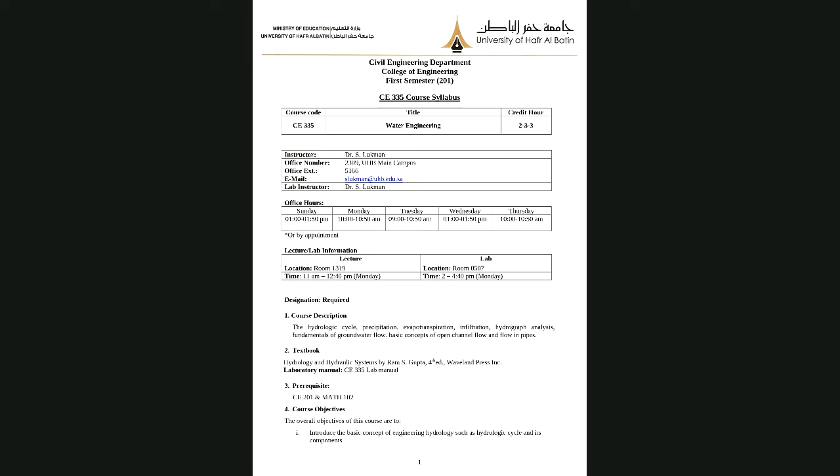These are the course objectives, which you can go through. Let me go to the second page. The course objectives, the course outcomes, the mapping, and then the chapters to be covered. If you look at the course, it's really a very heavy course. It has, I think, 16 or 17 chapters in the book, and we are to go over up to 15 or so.

So basically, it comprises hydrology and hydraulics. So it is a very heavy course which will introduce you to hydrology and hydraulics, or in general the water engineering aspect. But we will be introducing you to the basic concepts under each chapter. We will not go so deep. We'll introduce you to the basic concepts under each chapter, and then leave the rest for anyone that may be interested in taking option electives at the senior level in water engineering.

For instance, the same course is broken into about 3 or 4, about 4 courses at the senior level. So you have many courses that you can go and take, where you will be introduced to the deeper treatment of topics under the course. You can see here. So this is it. Let me go to the next page.

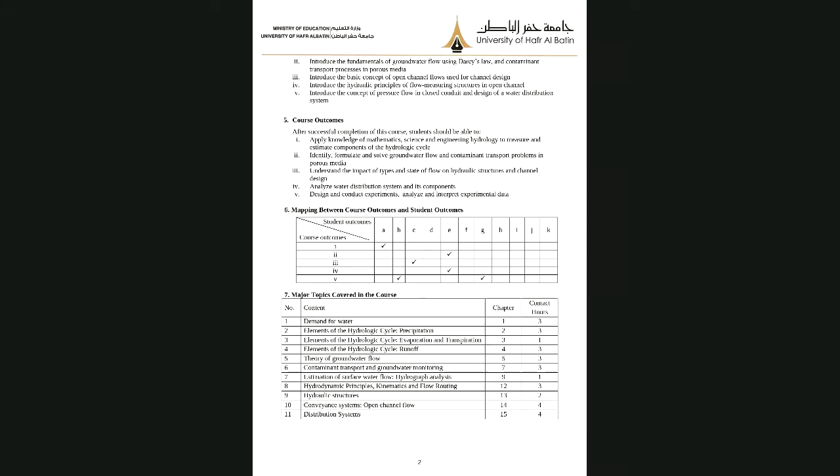So attendance in class, I think most of you took fluid mechanics with me, you know the rules for attendance. Although the lecture is going to be online while the lab is going to be on site, for the online as well you need to be available before the start of the class, which is on Monday at 11. You should be there. If you are late by more than 5 minutes, you will be marked as absent, okay?

And for the lab, you should be available at 2 exactly, because we are going to start at 2 exactly. And then, of course, the DN policy: 3 absences, warning 1. 5 absences, warning 2. 7 absences without excuse, DN. With excuse, DN is 10. And for the lab, missing 1 lab is warning 1, 2 labs warning 2, 3 labs is DN. With excuse, you have up to 4 labs. So you are all matured enough now not to just be absent like that. So I hope nobody will have DN in the course.

And when assignment is given, okay, if you have any excuse for not attending a class, you should get authorization from the college excuse committee. There is an excuse committee chaired by Dr. Slayer, although he is not here, but I think Shiraz is part of the committee where you can present your medical excuse or whatever it is for them to issue an official excuse that you are to present to your instructor.

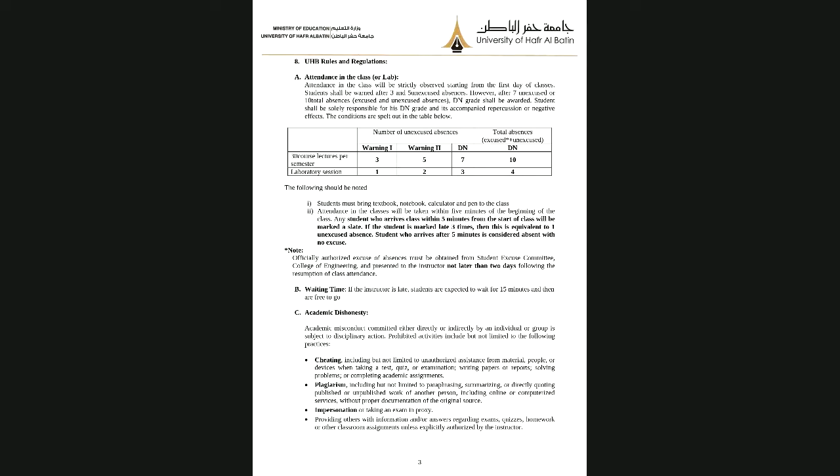Now, penalties for violation of academic integrity: of course, you can get 0, you can get F, okay? If you are found wanting, you can get F. I mean, the grade on the assessment can be reduced if it is established that you have really cheated. All this can happen. And then lab rules, we all know the lab rules, okay?

Now you will come in with your face masks, and we'll provide hand sanitizers in the lab, and we'll provide hand gloves, okay? And social distancing will also be established. Assignments and quizzes: as usual, every 2 weeks we will have a quiz, and every 2 weeks we will have an assignment, okay? And this is also in the weekly schedule, as we are going to see.

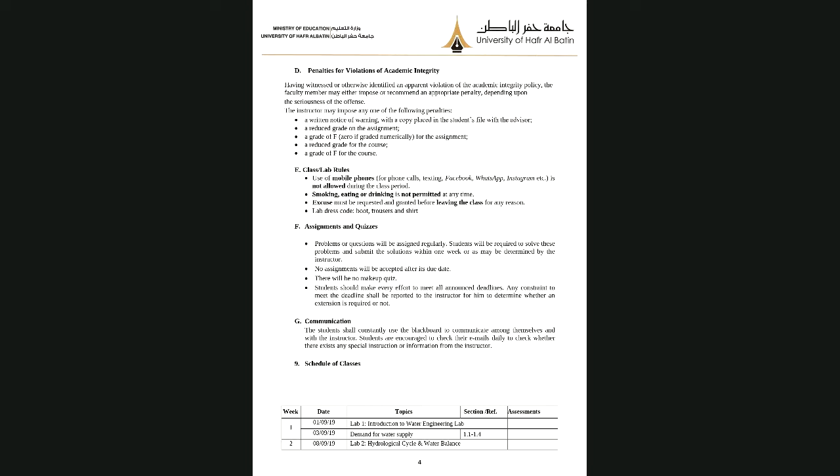Okay, so this is the schedule of classes for week 1, what we're supposed to do. Let me move to the next page.

I hope you can hear me clearly. Okay, good. All right.

So this is the weekly schedule, note the dates for the major exams. Major 1 is going to be held week 6. So start preparing now. And you have to ensure that you don't have any conflict with other courses, which we tried as much as possible to avoid, okay? So check your other schedules and ensure that you have no conflict. Don't come during week 5 or week 6 to say, no, I have a conflict with so-and-so course. Check all the syllabi, check the major exam dates now.

And ensure you have no conflict. Of course, when forming this schedule, we ensured that there is no conflict with general courses and what have you. So check to ensure that you have no conflict. It is your responsibility, not ours. And don't come week 4 or 5 to say I have a conflict, because then it may be too late. And like I always say, start reading from now. You don't wait until week 5 or 6 when the major is around the corner before you start reading.

Our major 1 is going to be week 6 on Sunday at 6 to 8, okay? And it's going to cover the first 4 chapters. And the midterm lab major is week 9, during the lab hours, and major 2 is going to be week 11, okay?

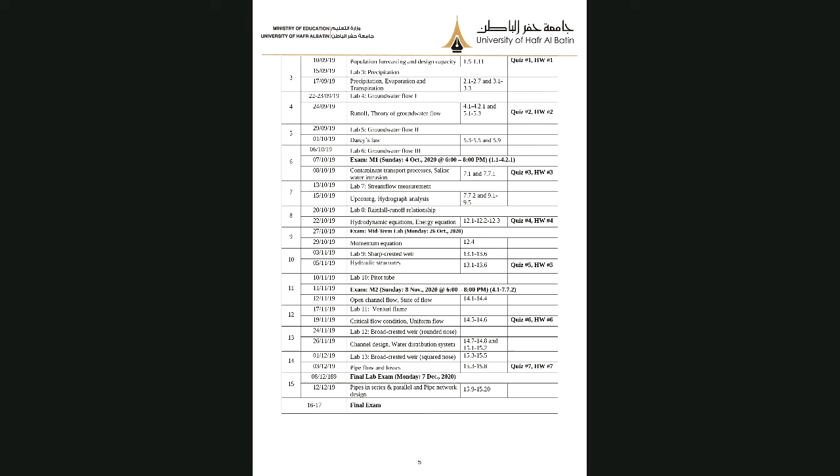Okay, so then the final lab is going to be on 15 during the lab hour. Now the next. Okay, this is the major exam schedules. So, like I always say, please check your other courses and ensure that you have no conflict. If you have any conflict, report to the instructor ahead of time. Report now. Don't wait until it is week 4, 5, or 6 that you will realize that you have any conflict, and then you will begin to run helter-skelter here and there.

Okay, check all the syllabi and ensure that you have no conflict. Make a calendar for all your major exams. And I think I will also create a WhatsApp group for the class, so that it may enhance our communication. Although nowadays I normally keep my phone in the office, so it's active during the working hours. When I go home, it may not be there, but the WhatsApp group may be a very good way to communicate.

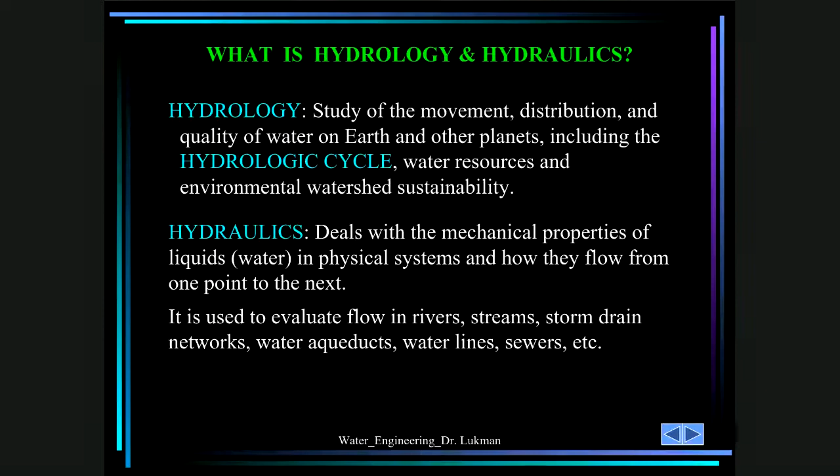Okay. Like water engineering. What do you want to say, Hamdan? You said D, is it D? Are you referring to the previous? Oh, like water engineering. Okay, clear. All right. Oh, you are referring to the reading quiz. Okay. Now the next slide. Feel free to ask any question, please. If there is anything not clear, feel free to ask. Okay.

Yeah, you can see this. Reducing its size because you can see that it has overshoots.

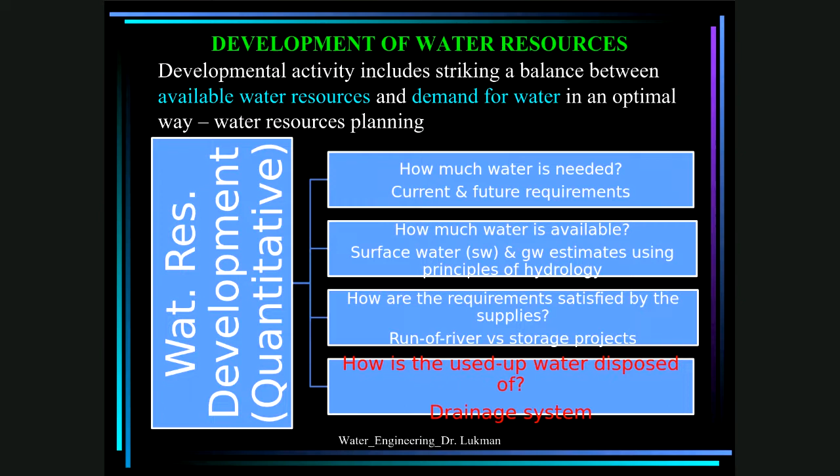Now we will move to the other part, which is the qualitative part. Any question before we move on? Here I saw Muhammad Bashar saying groundwater, surface water. So what do you want to say? If you want to talk, you can talk, okay? Your audio is enabled. So if you have any question, you can always talk, okay?

So now, still on water resources development, is water like environmental engineering? What do you mean by is water like environmental engineering? Water and environmental engineering go hand in hand, as we are going to see here. The qualitative part has to do with environmental engineering. Let me present this slide and then I will come back to your question.

Okay, so for water resources development, I explained the quantitative part having to do with the quantity, the source of water, and then how we dispose of the used up water. Now the qualitative part deals with the quality of water. What type of water is needed? What is the quality? Do we just go to the ocean, get the water and pump it to the household? No, the quality is very bad because the ocean water is salty. It needs to be treated.

And that tells us what kind of water as well. Is it water from the ocean, from rivers, from lakes? What treatment is required? Because once we ascertain the quality of the water, that will tell us whether we need to treat it before distributing.

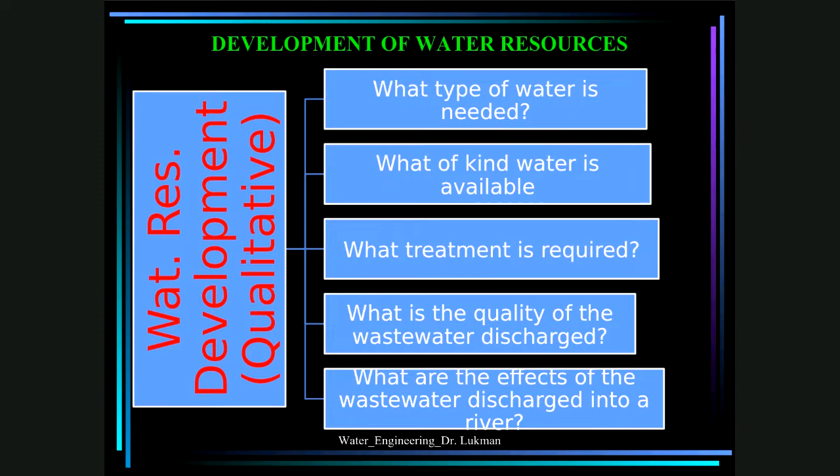Now, demand for water supply. Okay, I already started explaining the demand for water supply. Here I will explain some specific things. Withdrawal uses. Okay, we use water. This involves diversion of surface water or groundwater for irrigation or water supply. Okay, when you take out water from any source, either surface or groundwater, for irrigation or water supply, this is withdrawal uses, and we have non-withdrawal uses.

Non-withdrawal uses means we use the water in place, in situ. Okay, we use it in situ, that's in place. Involve on-site uses such as navigation. Navigation here is just providing pathway for boats, for ships to navigate, to move around, okay, on the water.

And for recreation, you have the Corniche, okay, where you just go and relax and look at large bodies of water, and then just take some refreshment and enjoy the scenery. So these are non-withdrawal uses because you just go by the side of the ocean and just watch, okay, and that's it. And then you have the consumptive uses.

The consumptive uses here refers to withdrawn quantity that is no longer available for further use. That is, it is water you withdraw, similar to one. But then, like in irrigation, when you just pour water on the crops, some will sink to form the groundwater flow, and some will run down the channels. Okay, but then some of the water will be used up by the crops.

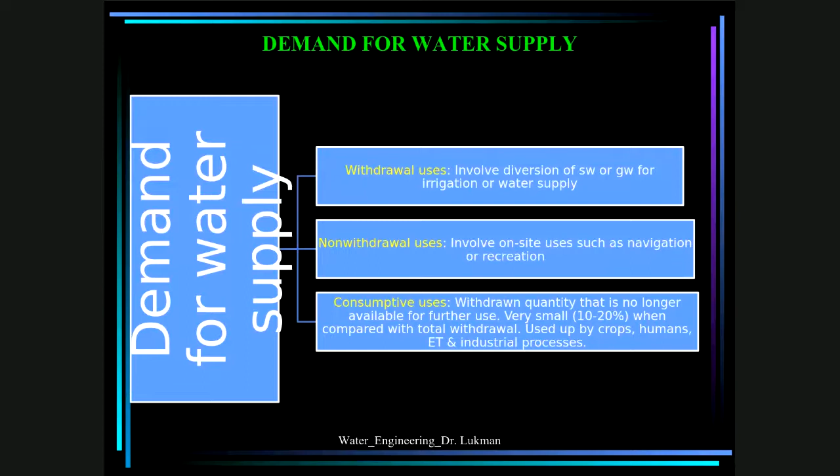Now, this is figure 1.1, which is about water requirements of a city of 150,000 population. Hafrul, I don't know how much is the population of Hafrul, but probably maybe 300,000. I don't know. Okay, let's say around 300,000.

So here in this figure, you have well... 1 million. Woo! So Hafrul is a big city. Okay, yes, Doctor, 1 million. So it is really a big city. But I tell you, 6 years back, it wasn't 1 million, maybe 600,000 or thereabout. It is growing by the day. Every now and then, it is expanding, and a lot of development, I tell you.

So here you have a well field, and you have a river flowing. So part of the water from the well and part from the river are supplying this city at which rate? 35 CFS. CFS is cubic feet per second. So out of this 35, household use is 40%, commercial 13%, small industries 30%, and public and losses 17%. You always have losses in the system, like pipe leakages and what have you, okay?

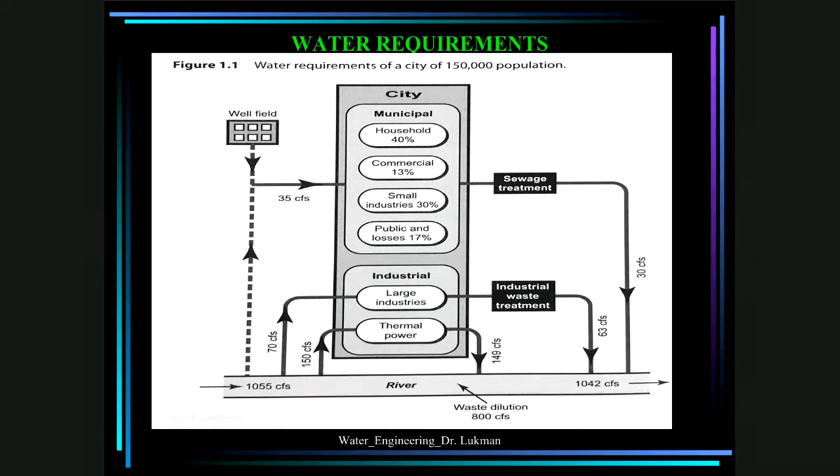So now, get your pen and paper. I will ask you a question now. Concept quiz, very simple question. From figure 1.1, the municipal consumptive use is A, B, C, or D. So now tell me, what is the municipal consumptive use? Type your answer.

Municipal consumptive use. Can you hear me? Yes, Doctor, yes. So what is the answer? Type your answers, all of you. I want to see answers from all of you. Ahmed, Abud. What about the remaining guys?

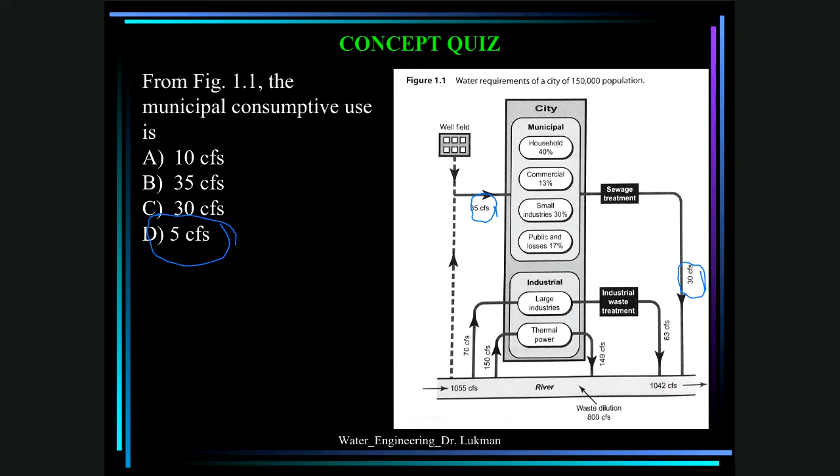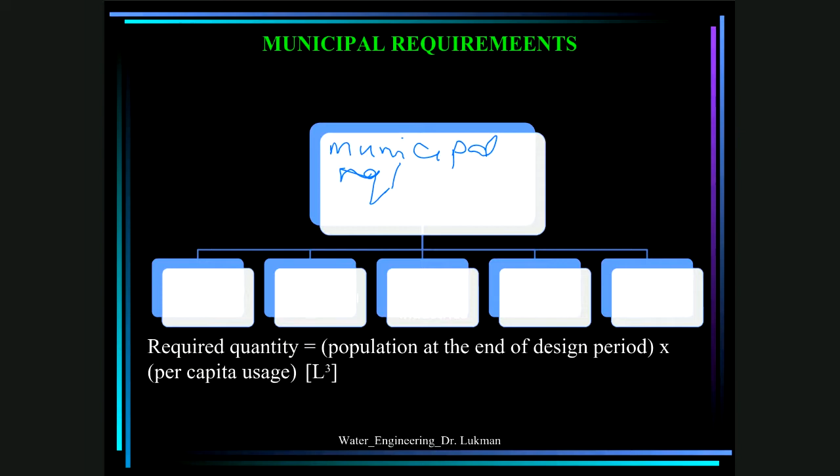I can just write it. Municipal requirements depend on. Okay, so the first here is population, and then population characteristics,

and then nature and size of industries, and then climatic conditions. It will be clear on the slides when I upload it on Blackboard. Okay, and then cost of supply.

So municipal requirements for supply of water depend on the population. Of course, population is one of the most important factors here. You need to know the population size that you want to supply water to, and then the population characteristics. The population characteristics here may refer to how are they increasing? Is the population the same or are they reducing? You may have some towns whose population is reducing.

Okay, and then nature and size of industry. Do you have huge industries, large industries that demand a lot of water, or is it that you don't have any industry? And climatic conditions here, the weather: is it a country in which it is very hot? In hot weather definitely you need more water than in cold weather.

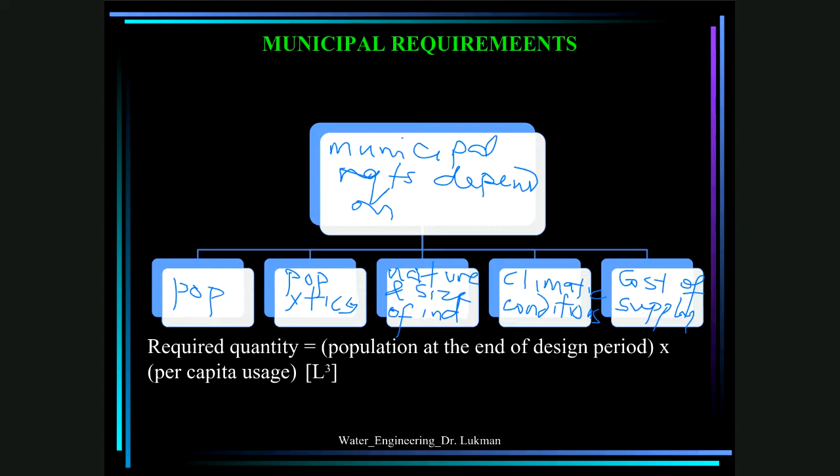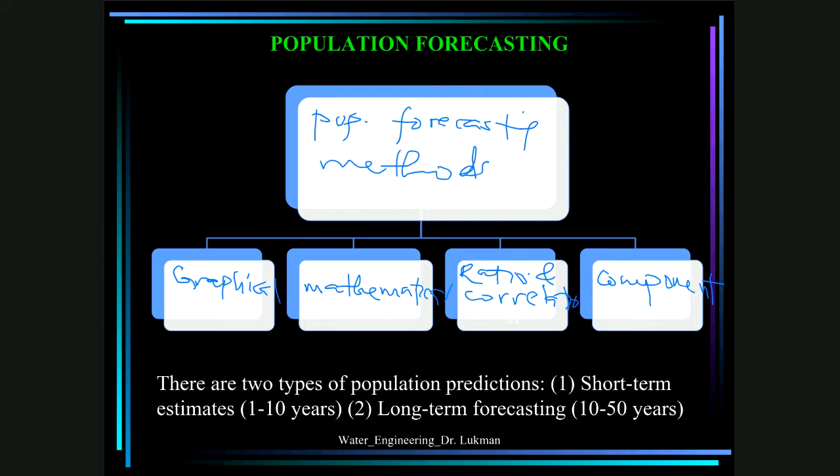Now, short-term estimates, 1 to 10 years, have many methods under them. This is the population curve, population versus time in years. From A to B, you have the geometric growth, in which the rate of population increase is directly proportional to the population that is currently obtainable. So dP/dt is proportional to P.

Then you have B to C, what is called the arithmetic growth, or constant growth: the rate of population increase is constant, so it's proportional to 1. The population is increasing at a constant rate, and that is why it is proportional to 1. It can just be proportional to k, where k is a constant. And then you have C to D, which is the declining rate of growth.

In this case, the rate of population growth is proportional to the difference between a saturation population and the population, which is P sat minus P. For our discussion here, we will take examples of the geometric growth and the arithmetic growth, as well as the graphical methods. So, next.

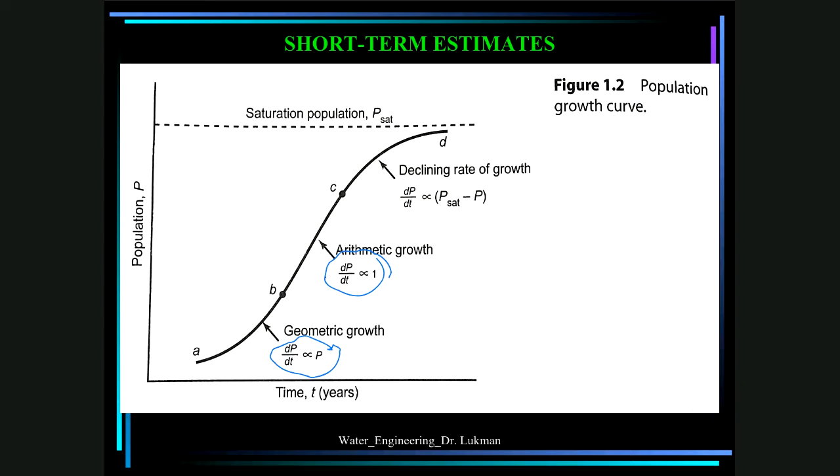Now, for the arithmetic method, like I said, the rate of growth is a constant. The rate of growth of the population is proportional to 1. So when you remove the proportionality sign, you introduce a constant. So this constant Ka, the A is indicating the arithmetic growth, where P is the population, T time in years, and Ka is the uniform growth rate constant. That is the rate at which the population is increasing.

And when you integrate this, of course, when you have dP equal Ka dt. From your math 102, you integrate, isn't it? When you integrate here, this becomes P from P1 to P2, and then this constant Ka, and then T from 0 to delta T.

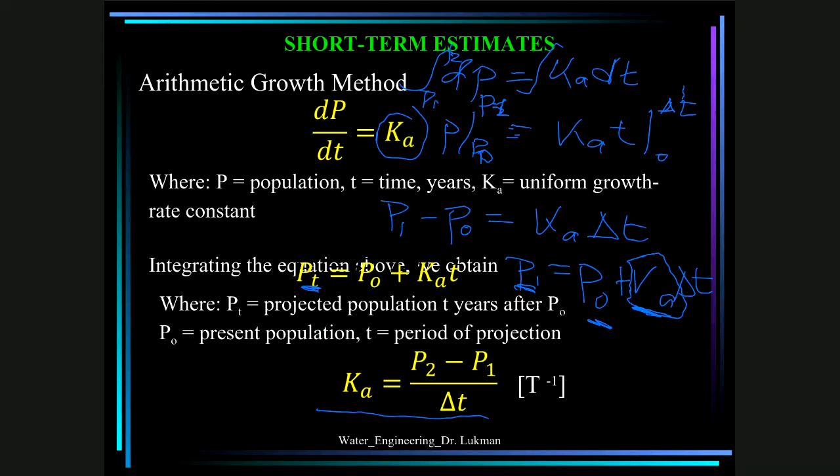Here, if you make Ka the subject of the formula, you will arrive at this formula. So Ka is equal to P2 minus P1 over delta T, because that is the first thing you need to do. You need to determine the uniform growth rate constant. It is when you determine the uniform growth rate constant that you can find the projected population. We are going to solve some examples. Now, this is for the arithmetic method.

For the geometric growth method, we have shown from the graph that the rate of change of the population is directly proportional to the current population. So when you remove the proportionality sign, you introduce a constant Kp, which is the population growth constant for the geometric method. And when you integrate, similar to what we did before, you will arrive at this, and when you make Kp the subject of the formula, you will get this formula. So Kp here is the geometric growth rate constant, and the unit is per year, time here normally in years. We are going to solve examples where we will apply these equations.

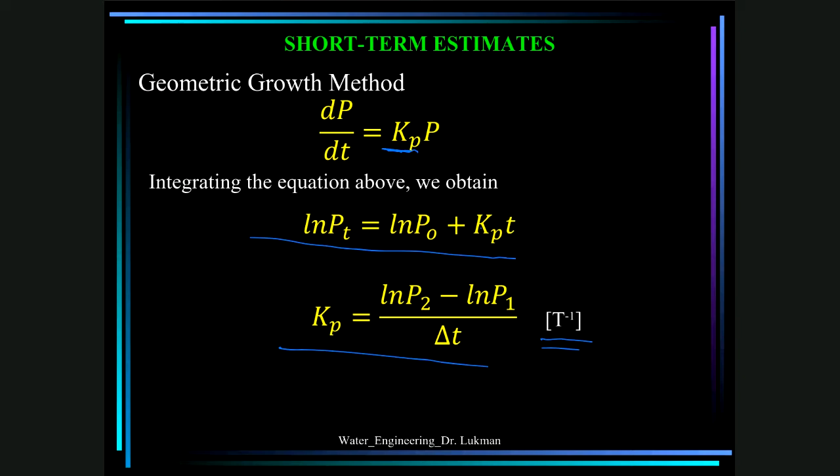So let me move on. In the example here, get your pen and paper, please. From the following census data, estimate the 1995 and 2010 population by A, the graphical method, and B, the most appropriate mathematical method. Here you have the years 1970, 80, 90, and 2000, population in thousands. So 25 here is 25,000, 30.5, 37.25, 45.5. This is the census. Census is counting population.

So we have to estimate the population for 1995. 1995 lies between 1990 and 2000, isn't it? So this is where 1995 will be, correct? And then 2010, after 2000, is going to be here. So let's see how we do that. First, using the graphical method, and two, using the most appropriate mathematical method. The arithmetic method, the geometric method, they are all mathematical methods.

Now, simply plotting this in Excel, you are all conversant with computers. You might have learned Excel, but if you haven't, don't worry. For numerical methods, CE 301, you will learn Excel, and there you will learn how to plot and how to find the line of best fit.

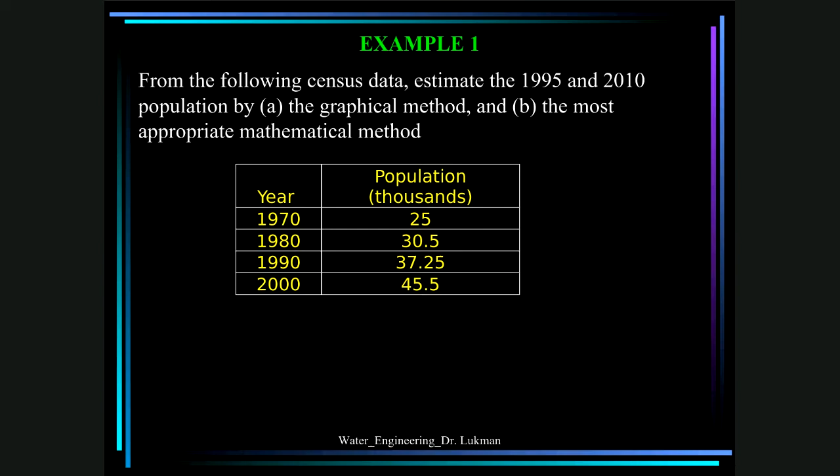Now the other method, because it says the most appropriate mathematical method. So here you may choose to use either the arithmetic method or the geometric method. Usually you will realize for a given problem they may not differ so much, but for demonstration, let me use the arithmetic method here.

For the arithmetic method, we mentioned that we first have to determine the constant rate of the population growth, the growth rate constant, Ka, which is given by P2 minus P1 over delta T, correct? And if we plug in the values, P2 here, it will be for 1995. So we will take the values of population from 1990 to the year 2000. And what is the population? What are the values?

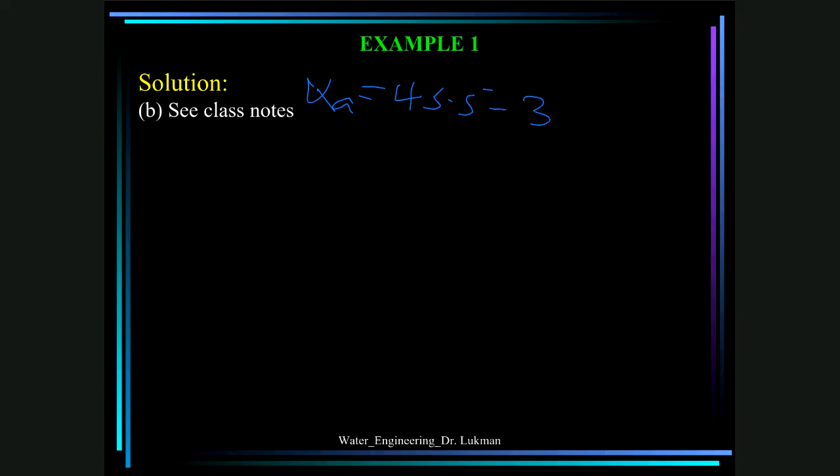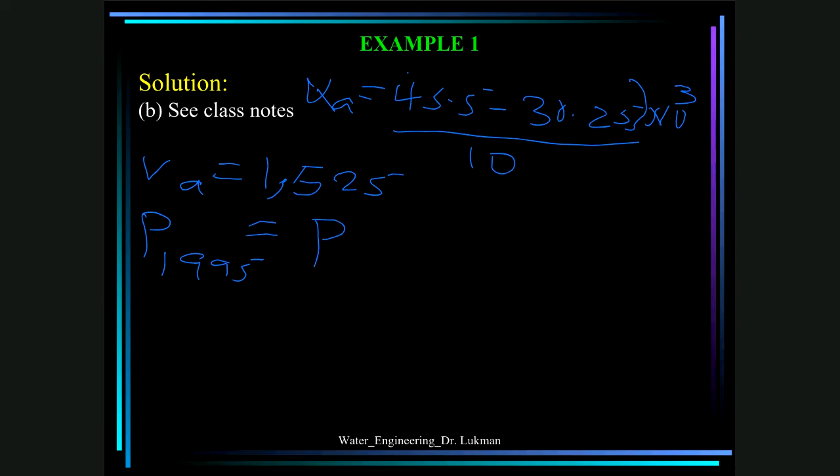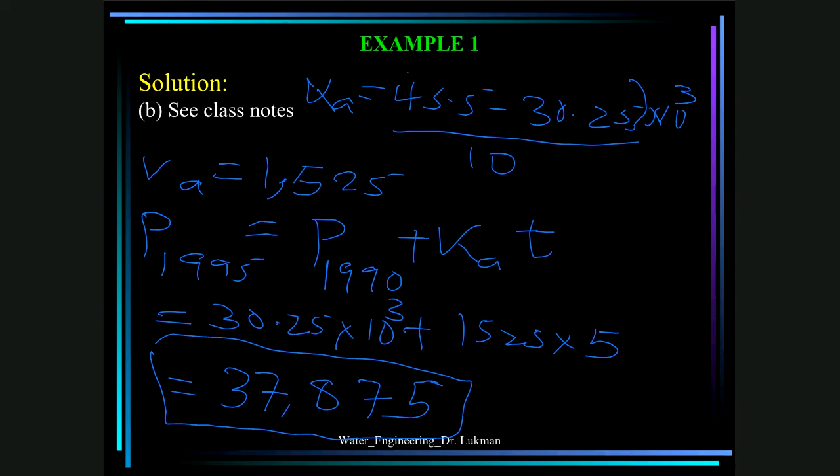So this gives me 37,875. Yes. So this is the population for 1995. And if you like, you can use the geometric method as well to check. The value may differ slightly. Why 5? Because from 1990 to 95, that is 1995 minus 1990, which is 5. It is the time. All right.

Now, attention quiz. You have to solve this and let me know your answers. From the census data provided in example 1, this table, estimate the 1985 population, not 1990, by arithmetic growth method. Here I'm specific. Hint: find the population growth constant Ka using 1980 and 1990 populations. You have 2 minutes. Just post your answer A, B, C, or D.

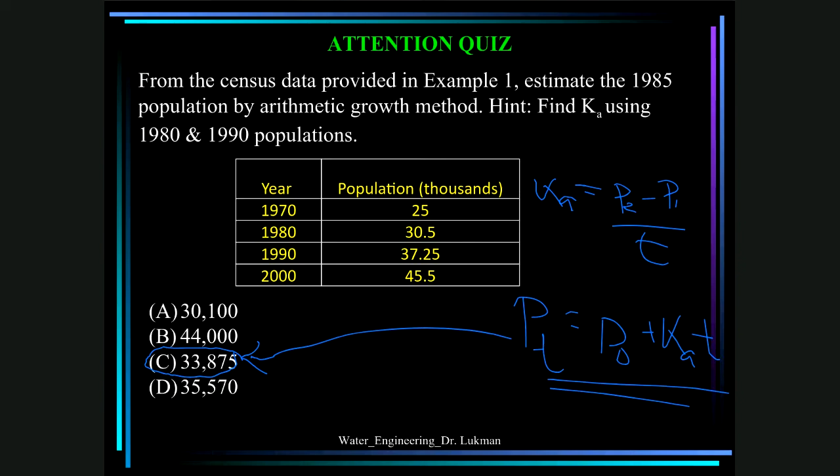Now this says a city has a present population of 200,000, which is estimated to increase geometrically to 220,000 in the next 15 years. The existing treatment plant is 51 million gallons per day. MGD is million gallons per day. So the capacity of the treatment plant is this, the current capacity. The rate of input to the treatment plant is 165 gallons per person per day. For how many years from now will the treatment plant be adequate?

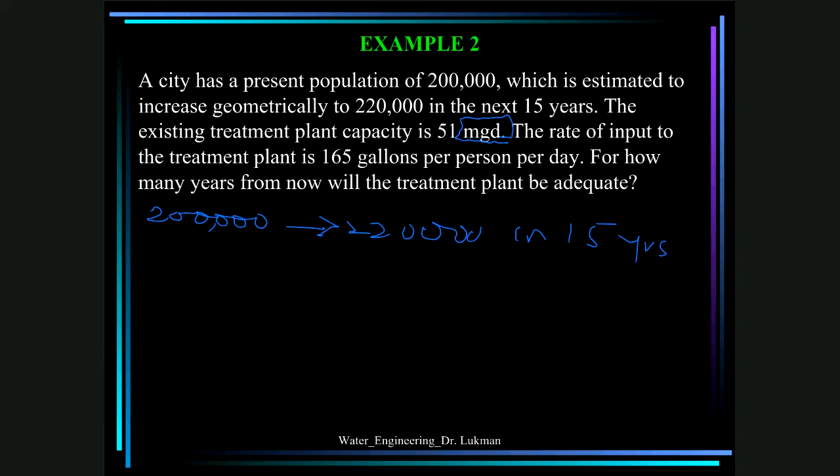Let me break down the question so that we understand. We have a population now of 200,000, which will increase to 220,000 geometrically in 15 years. The current capacity of the plant is 51 million gallons per day. And the rate of input to the treatment plant is 165 gallons per person per day, or you can say per capita per day. Capita is person, that is per head. So the current input is 165 gallons per capita per day.

So now, the first thing that we need to do is to find the population that can be served by the plant based on these two numbers. This is the plant capacity, and this is the input per capita per day. And how do we do that? By just dividing. This is in million gallons per day, and this is 165 gallons per head. Per head meaning that is the population.

Gallons per capita per day. So now gallons cancel, day cancels, so capita will now give us the population. So in total we will get about 309,000 persons. So the plant capacity will be able to serve this number. Remember, the current population is 200,000, and it will increase to 220,000 geometrically in 15 years. The question is, how many years from now will the treatment plant be adequate? The plant can serve up to 309,000 persons, but it is currently serving just 200,000.

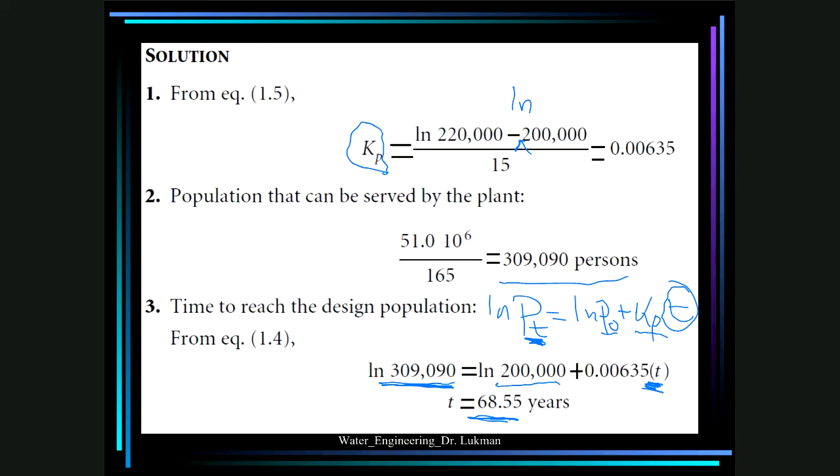Yes. Doctor, I have a question. You are my advisor. What? You are my advisor, Doctor. Okay. I have a problem. Okay.